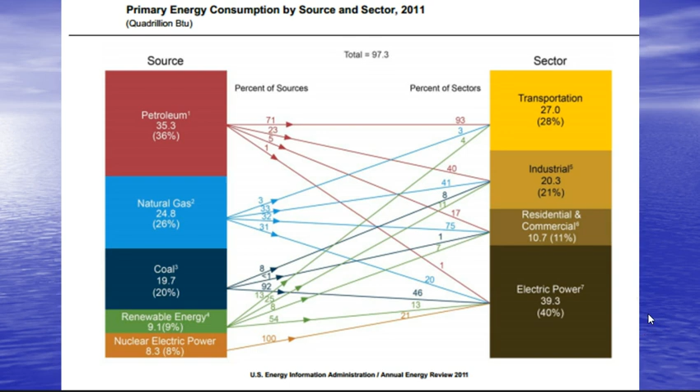Now, I put this up here, and you'll notice that hydroelectric power is not on it at all. Hydroelectric power, while it is a conventional energy source, is also a renewable energy source.

So if we shift over and start looking at just the renewables, we take that same information and say okay, renewable energy is 9%. You can see that out of that, hydroelectric is 35%. So what does that mean? What are we doing? Well, we are generating electricity with it.

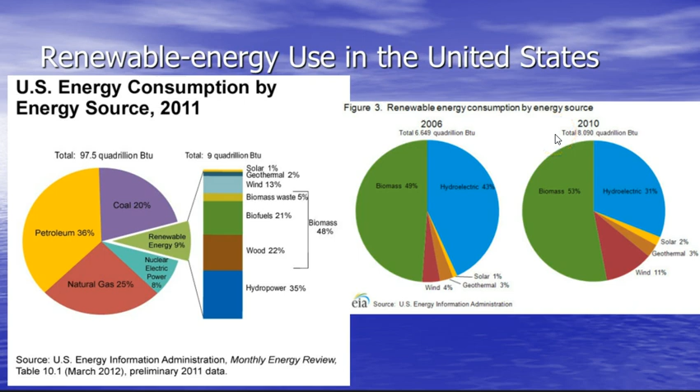Now, on the plus side, since 2006, hydroelectric has actually become a smaller percentage of what we're talking about, because all of these other sectors, with the exception of geothermal, have actually grown. We'll talk about what we mean by biomass, wind, and solar should be pretty obvious, but we'll talk about that too. So this is a good thing, and you can see that the overall amount of energy is much larger, so that's a good thing.

Now, getting back to dams, what do dams do? Well, there are four big things that we use dams for: preventing floods, providing drinking water, providing irrigation, and generating electricity.

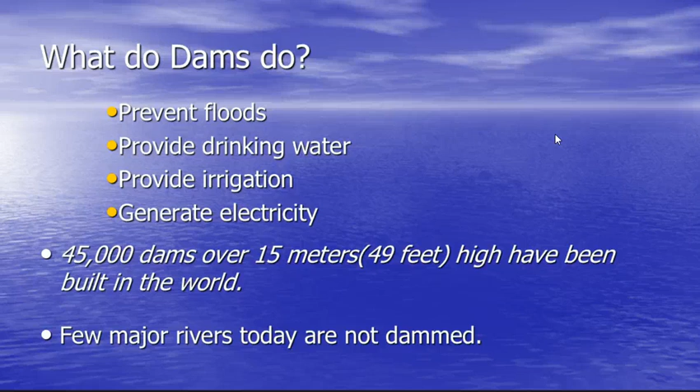We actually have over 45,000 dams in the world that are 50 feet tall or higher. We've basically dammed every major river. As a matter of fact, we've gotten to the point where we've started taking away dams, because we've diverted water so much that we just can't continue doing that, since in many cases it's actually unsustainable.

But when we look at the overall picture, there are some clear benefits and clear costs of dams. The benefits are great, and the disadvantages are huge. So this is just an overview, but let's actually look at it.

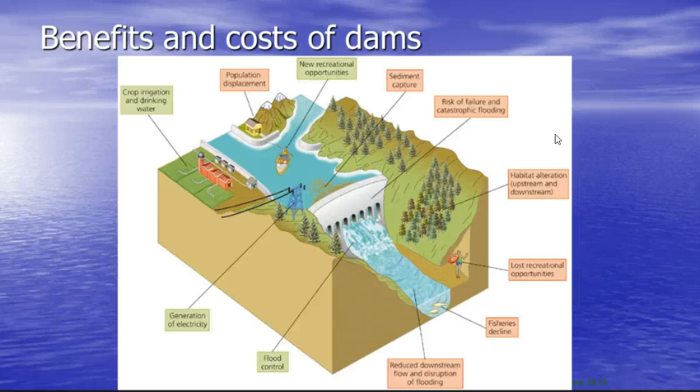So what are the advantages? You get a really moderate to high net energy production with very high efficiency. To give you a comparison, coal is about 38% efficient, hydroelectric is 80% efficient. That also means it's pretty low cost, because all you have to do is rely on the river flowing through the power plant. It has a very long lifespan provided it's built well, and you get that added benefit of flood control while you're generating electricity. There is no CO2 or pollutant emissions during the operation of the dam.

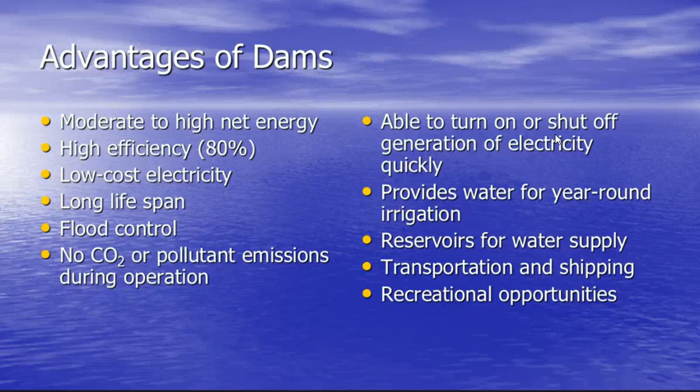You can turn it on or shut it off really quickly, which is not true for, say, nuclear power plants. Those take time to spool up and shut down. Same thing for coal-fired power plants. You also have a reservoir that will give you water for year-round irrigation, and for cities, municipal water supplies. You can also dam rivers to make deeper channels so you can have transportation and shipping. And then, of course, you get a big old lake, which is a great recreational opportunity.

Which brings us to our first question: dams can lose more water than they provide. Well, that's an interesting statement. That statement is actually true. Even though you're damming the water to use it, the way the dam works can sometimes involve lots of evaporation, because instead of having that nice flow, you get this big, deep standing water, and you get lots and lots of evaporation off of the reservoirs and dams.

And there are some other disadvantages too. High construction costs—they are tremendously expensive to build. Now, fortunately, we've pretty much built all the large dams that we can build, because everything's pretty much already dammed. There's also a huge environmental impact that we'll talk about, including flooding natural areas.

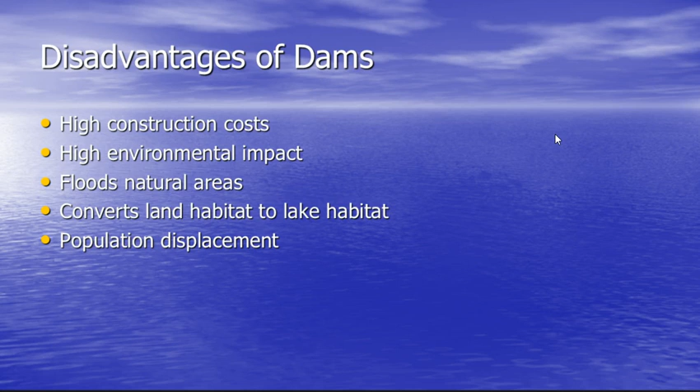It converts land habitat to lake habitat in that flooding, so you get not just this flooding of the ecosystem, but also population displacement. People have to move, and large dams have actually displaced somewhere between 40 and 80 million people worldwide, most of whom were not officially resettled or given compensation. Their land was just flooded. In the developed world, you are given compensation if something happens to your land, but in the developing world, that is generally not true.

So what else? Well, when you stop that water, you decrease the sediment flow, so you don't get the nutrients to the rest of the river downstream. You're going to decrease the fish harvest because you've decreased the sediments and nutrients, which means you've changed the ecosystem and the plants that can grow, so you've got fewer fish. You actually destroy the native fisheries because not only do you decrease the fish harvest, but you also stop fish migration. We're gonna talk about a bunch of these in just a second.

It's going to change the water temperature above and below the dam. Above, you've got deeper, still water, so that's colder. Below, you've got shallower, a lot less water, so it's going to be a lot warmer. The pHs are going to change because of these temperature changes. And then you're also going to have high CO2 emissions, not from a power plant.

But remember, you've got this reservoir, and then you have the river downstream. As biomass builds up in the reservoir because you flooded all of these land areas, that's going to decay and emit CO2. Same thing on the downside—you've killed all this stuff, and that's going to decay and emit all kinds of CO2.

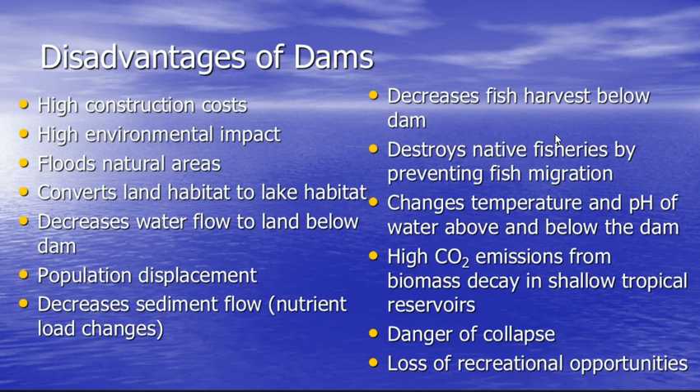Okay, so let's talk about some of these specific disadvantages in detail, starting with fisheries. A really famous example is salmon in the Columbia River. The salmon population got really, really low because multiple dams actually impede migration. So they tried hatchery approaches, doing aquaculture to raise salmon and release them, and it really failed.

So what they had to do was build what are called fish ladders—ways for the fish to actually cross the dam successfully. Now, this is great, but it's not effective enough, and so there are now some plans to actually remove dams on the Columbia River to reinvigorate the salmon population.

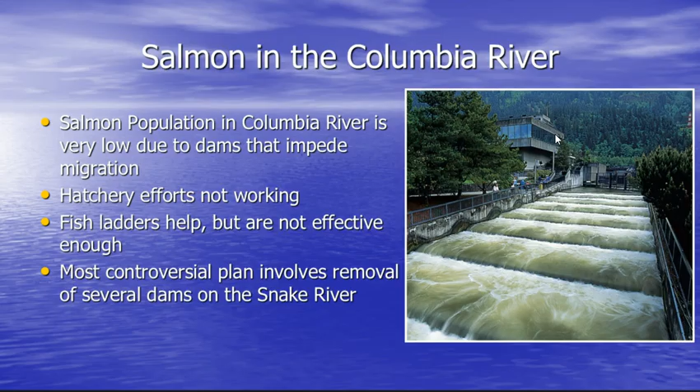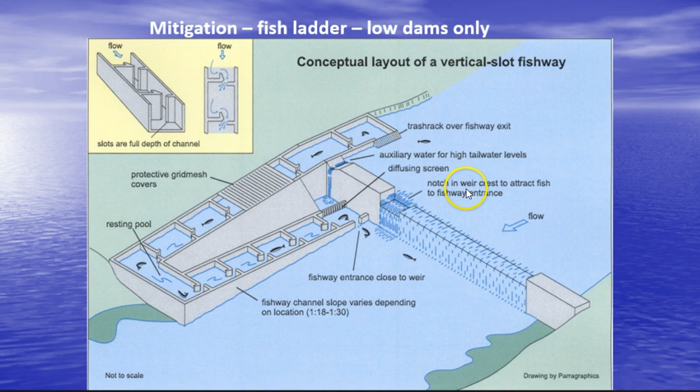Just to give you an idea, a fish ladder is basically a nice little passage where the fish can go up into little pools. In a way it's like locks for fish, except they don't actually close the door with the fish in them and let them go—although some do. So you've got these little fish channels, a gentle slope, and then they go right up and over, because they can flow over the dam. That's not the problem—it's coming back the other direction.

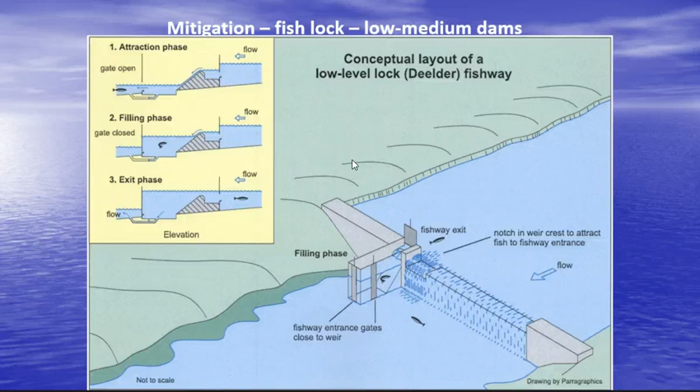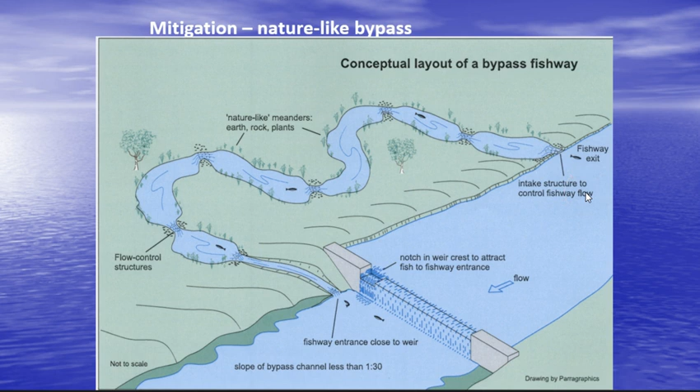If you have a higher dam, you might have a fish lock, just like you have for boats. And if you have the space, the best way is to make a fish bypass—another little river, so these fish can swim up and have a wonderful natural experience, ending up back in the big river at the top. This does not always work because you need the space and the ecosystem, and a lot of times you just don't have it.

Now, what are some other options? Well, reservoir fisheries—this is where you actually raise the fish in the reservoir, and it's monitored. They release the little fry and fingerlings, these baby fish. But it doesn't actually compensate for the lost river fisheries.

Different fish need different environments, and that doesn't work as well as it could. Aquaculture is great, and there are lots of places where we're starting to use aquaculture to replace river fish and ocean fish. As pressures on fisheries increase, aquaculture is going to be a growing thing. The problem is there are added costs, different beneficiaries to the fish and the profits, and a large environmental impact depending on what you're growing. For salmon, they foul the waters they're in a lot, which we talked about with fisheries.

Moving to the next thing, let's talk about the Glen Canyon Dam. It's a really good example of sediment issues in dams and reservoirs. Because its regulated flow has prevented sediment from traveling downstream, it's actually changed the ecosystem in the Colorado River and Grand Canyon.

Before dam construction, you have all these great sandbars and sediment, all this vegetation, and that's super. After the dam construction, it started to erode all of that and take it away. You got a thicker layer of sand on the floor, which was a problem for the benthic communities, and you didn't have these nice sandbars that would slow the water down and allow nutrients to be distributed.

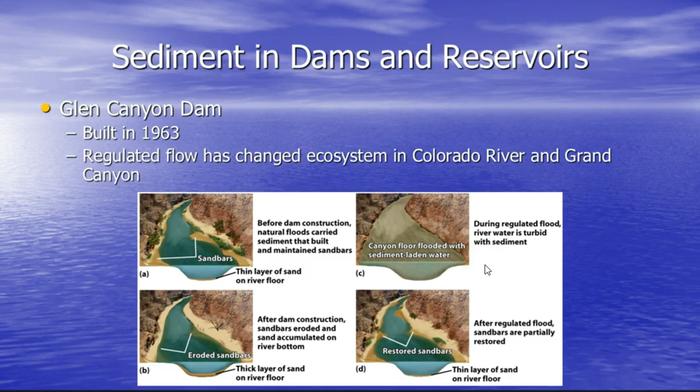Now they've started doing these regular floods, these regulated floods, on a fairly regular basis, because while you do get this fast water, it is sediment laden, so you can actually start restoring some of that sedimentation.

After the dam construction, they've blocked the river, and it's just flowed a little bit, fast and all this good stuff, so you lose vegetation. Then you have this regulated program where you flood the river periodically, so you restore the sediment, and then you can start to see the river take the shape it had before. That's nice.

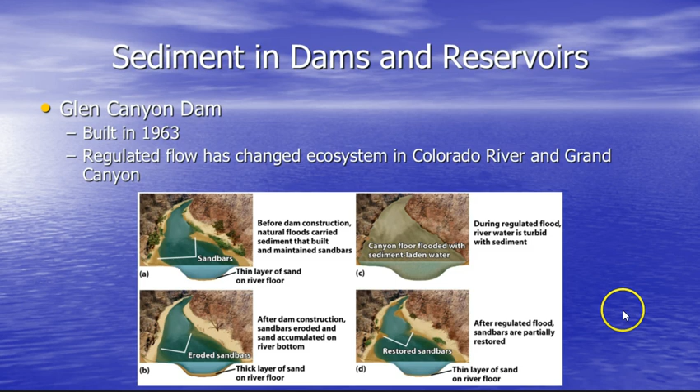Okay, now moving on.

One of the things we're starting to do is remove dams. Some of the smaller dams are being removed. Now, a lot of people actually want to get rid of larger dams. This can be a problem because these are used for water supplies for cities, for irrigation, electric power, and things like that. But on the plus side, large dams probably won't be removed, but small dams really can be in a lot of cases.

So dam removal, what is it good for? It restores the river, right? It reestablishes the fisheries, and you can go back to having some of that river recreation like rafting and fly fishing. Very exciting.

Okay, now here's your question. Subsidies for renewable or alternate energy sources are criticized by opponents who label them as unfair and a burden upon consumers. They make the sources more competitive with energy production from fossil fuels. Could be compared to subsidies provided to fossil fuel producers, including government costs for cleaning up pollution and maintaining access to foreign oil, for allowing investment and research that should ultimately pay off when fossil fuel supplies dwindle, or all of the above.

Well, a lot of alternates actually do have subsidies, and that can include hydroelectric projects, although not so much anymore since they're already built. They are criticized by opponents who label them as unfair. However, fossil fuel companies do get subsidies, and that does include the cleanup for things, because it is the government, ultimately, most of the time, that pays to clean up. Think about the Exxon Valdez—that is actually what happened there, and Exxon still has not paid for it. And it is the government that keeps shipping channels open and maintains relationships so we have access to foreign oil.

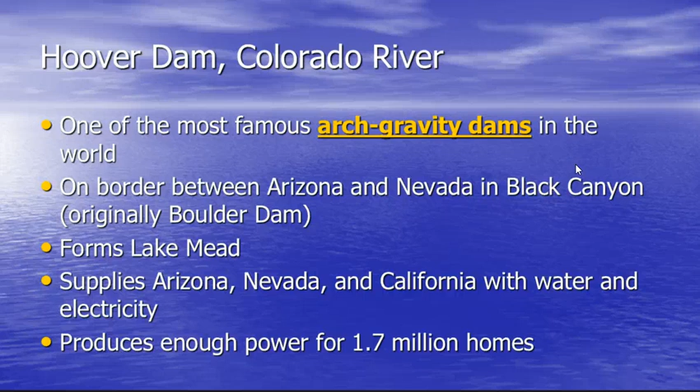This is the one that actually forms Lake Mead, which we've talked about before, and it supplies Arizona, Nevada, and California with both water and electricity. It produces enough power on a regular basis for 1.7 million homes.

It's huge. Now, the Hoover Dam problems: it prevents sedimentation downstream, and so it reduces soil fertility and increases erosion.

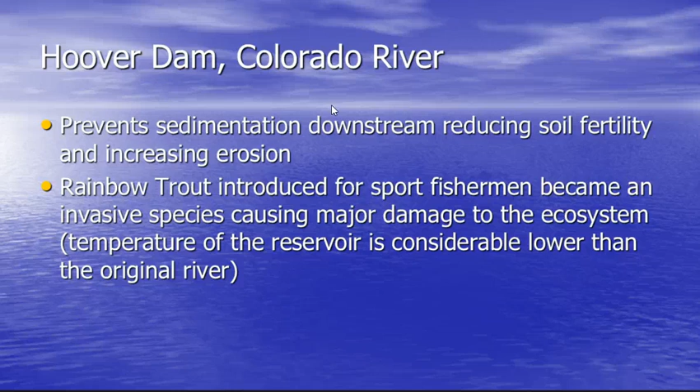And rainbow trout that were introduced into the reservoir are actually an invasive species, and they're causing major damage to the ecosystem, having to do with those temperature changes. Rainbow trout do really, really well, and so they are stocked in that reservoir, but they are invasive.

All right, second thing we want to talk about is the James Bay Project in Canada. This is actually a series of dams, a bunch of dams together, and it's the diversion of 3 major rivers that flow into the Hudson Bay to generate electric power.

This has resulted in massive flooding. I mean, it flooded an area the size of Belgium. This flooded the native lands of the Cree Nation, most of them actually.

And then the other problem is that mercury has leached out of the rocks and into the water, and it's been causing mercury poisoning in animals and nearby residents. And then of course animals suffered.

Just to give you an idea, looking at large animals, 10,000 caribou drowned when this project was implemented, during their migration, because it actually blocks off their migration patterns, and that's just some of it. I'm just hitting the highlights of the disadvantages.

And then the Aswan High Dam in Egypt. This is one of the largest embankment dams in the world. I've put little links to the different kinds of dams that you see here. This is on the Nile River, and it forms the world's 3rd largest reservoir, Lake Nasser.

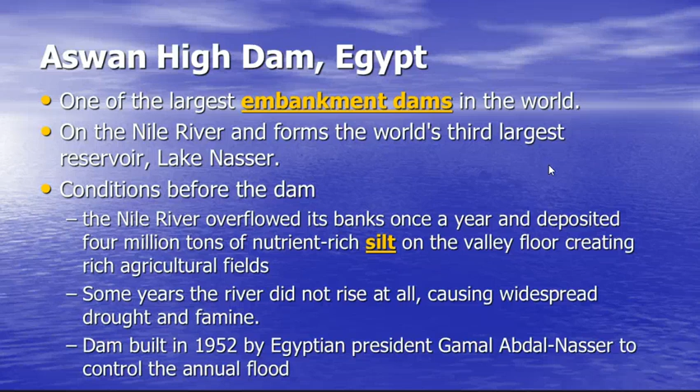But the water available is only half because of that evaporation issue, and it seeps into unlined canals. The Aswan High Dam actually loses lots and lots of water, which is a downside, but it does generate half of Egypt's electricity, so that's great.

It did relocate over 100,000 peasants who were not compensated properly. And the sediment restriction means that farmers downstream have to use a whole lot more artificial fertilizer than they did before.

And it's caused a decline in fisheries in the Mediterranean because you don't have the nutrients flowing down all the way. And then the other thing is because you have this change in the ecosystem, there were these snails that were the intermediate host for some schistosomes.

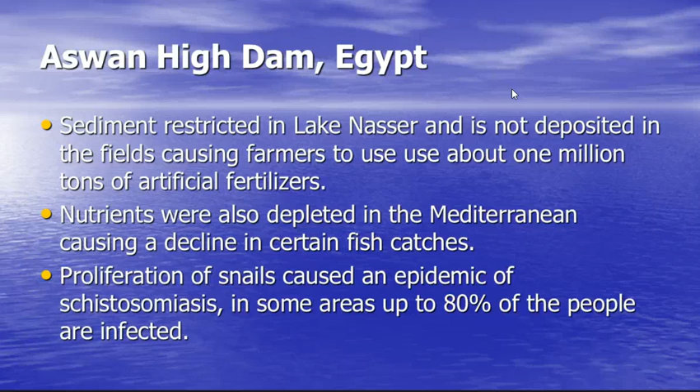Which are responsible for a condition called schistosomiasis, a waterborne infection. You had this epidemic where about 80% in some of these areas of people actually got sick with it. So you can see there are some huge problems with changing these ecosystems, and maybe things that are not anticipated.

Okay, and then Three Gorges Dam in China is the largest dam in the world, and it is going to be your class activity, so you're going to know all about that. If you have any questions in class, let me know, and thanks for listening.